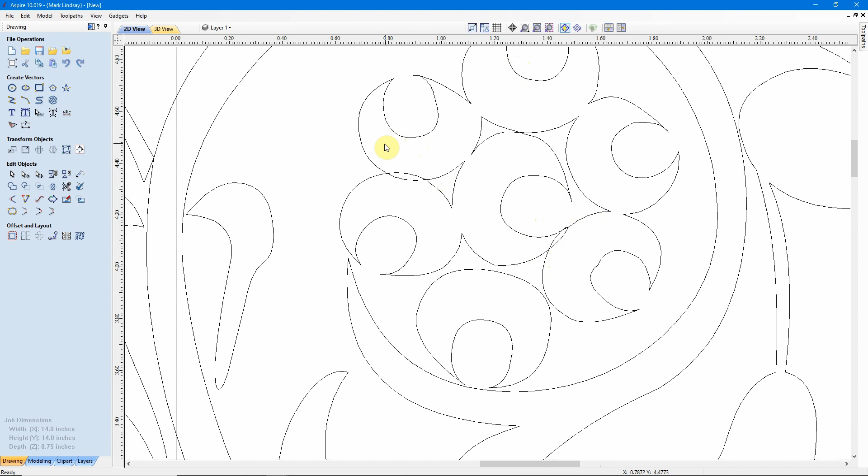Fonts are scalable vector graphics, but when you import one, they are still considered text. So when I select this, I get it in the solid pink lines because it is a text object. So what I'll need to do with this before I can fix any of these problems is I need to convert it to curves. And there's two ways I can do this.

I can right-click and select Convert to Curves, or I can click off, then reselect. I can come over here under Edit Objects to Convert to Curves. They both do the same thing. Either one, it's 100% your choice. So since I'm right here, I'll click on that, and now my solid pink lines have changed to dashed pink lines.

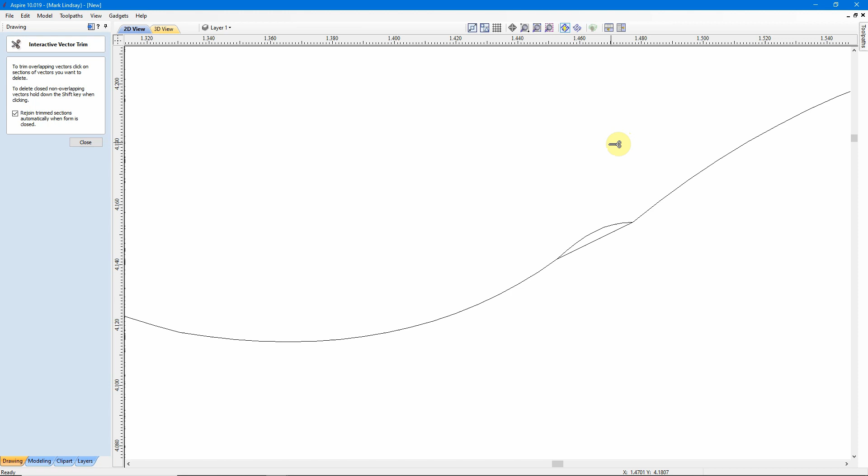I'll click off to deselect, and now I can come in here and I can fix a few of these overlaps. I'll just grab my trim tool, come along, and trim these where they overlap. I'll zoom in down here and trim that away. We don't have any other overlaps here. Those are pretty close together, but they don't overlap.

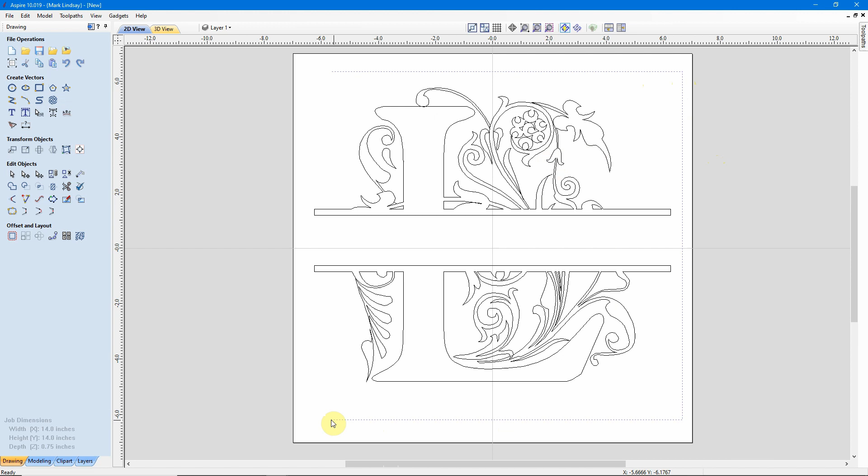Okay, now if you are paying attention, you'll see down here that we have another overlap. I'm going to back out of the trim tool for a minute, and I'm going to introduce a new tool for this. What I'm going to do is select all of my artwork here, and I'm going to use the Vector Validator. And we'll find the Vector Validator over here under Edit Objects, in the second row all the way to the right. I'll click on that icon, and I'm going to V-carve this, so I'll go into V-carving mode.

That modifies the search criteria for the Vector Validator slightly. It knows that you're going to V-carve this. It looks for things that are really going to impact V-carving. I'll go ahead and click Search Selected. It'll go through and search it. And now we see a bunch of symbols out here.

If we look here, we have zero length spans, meaning we don't have any pieces that are identified as separate vectors that have a 0 length. But we do have 4 overlaps and 45 intersections. So we'll need to clean up these intersections and these overlaps. Now what these symbols out here are, this gives us the key to these symbols. If we zoom in, we'll see that some of them have a plus sign. That's an intersection.

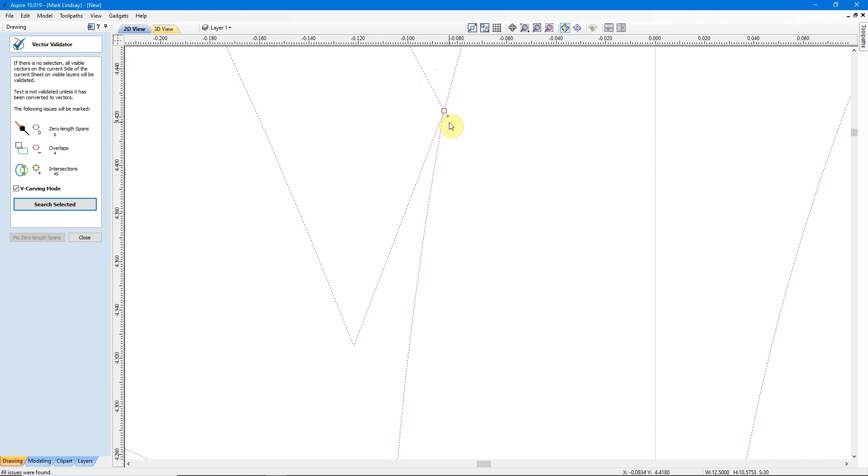I'll zoom in so you can see, that's telling me right here, this vector meets this vector. We'll need to fix that. Then we have overlaps. I'll look for the equal sign, and that's telling me that this vector here overlaps with this vector here. So this must be a separate vector.

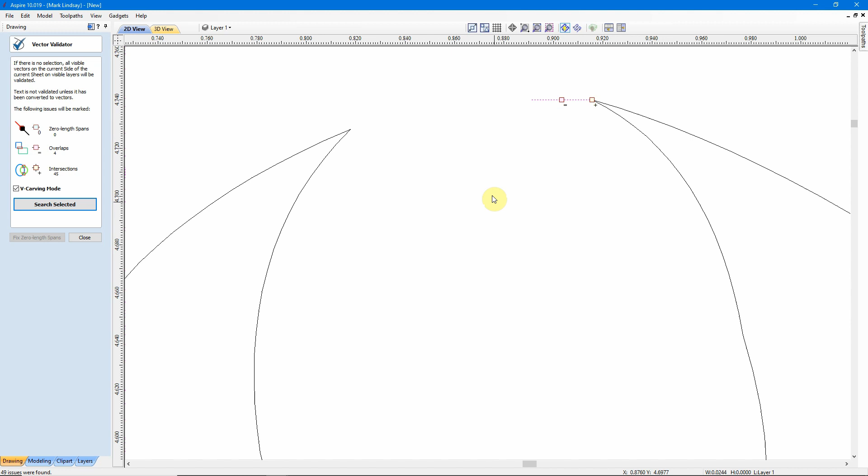So the way I'll check for that is I'll click off to deselect, click on it, and we see that it's a separate vector. Well, we don't need that. In fact, we don't want it at all. So I'll just tap the delete key on my keyboard, and it's gone. Now I can zoom back out and see if we have any other overlaps that are similar.

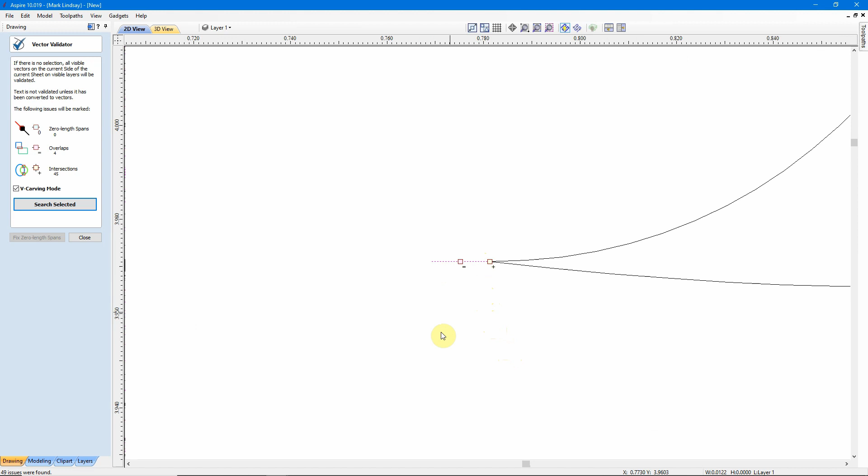Yeah, so we have one right here. So I'll select it, and it's the same as the other one we just got rid of. I'll delete it. Then I'll just kind of look around for other symbols. We've taken care of these two. And we'll now come down here and see we have these intersections. Right now I want to check for the overlaps. That must be down below here. And I don't see any more overlaps.

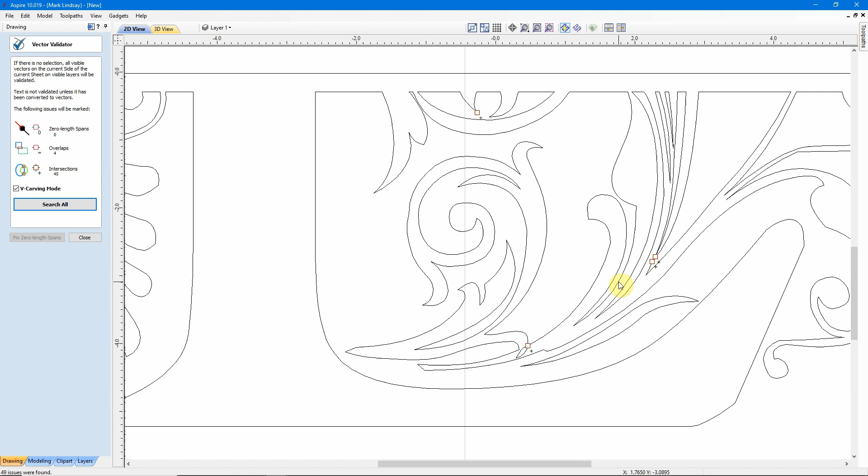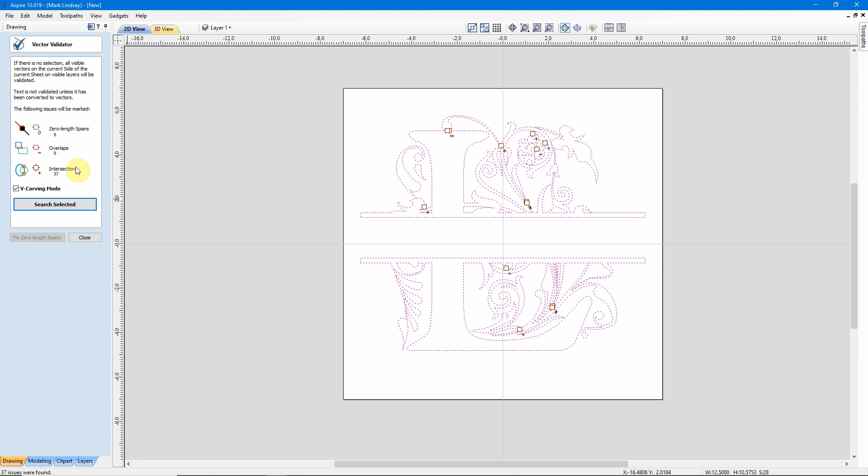So what we'll do is we'll click off, close the Vector Validator, select, and do it again. Vector Validator, V-carving mode, search selected. I now have 0 overlaps. That was enough to get rid of those 4, and it took care of a few intersections. Now for the intersections, that's a little bit different. We're going to have to come in and decide what we want to do.

For instance, we have this intersection right here, where this piece comes down and crosses over this piece here. Well, as a font, that doesn't really matter, because remember, fonts were designed to be printed. This was designed to either be filled with ink or laser toner.

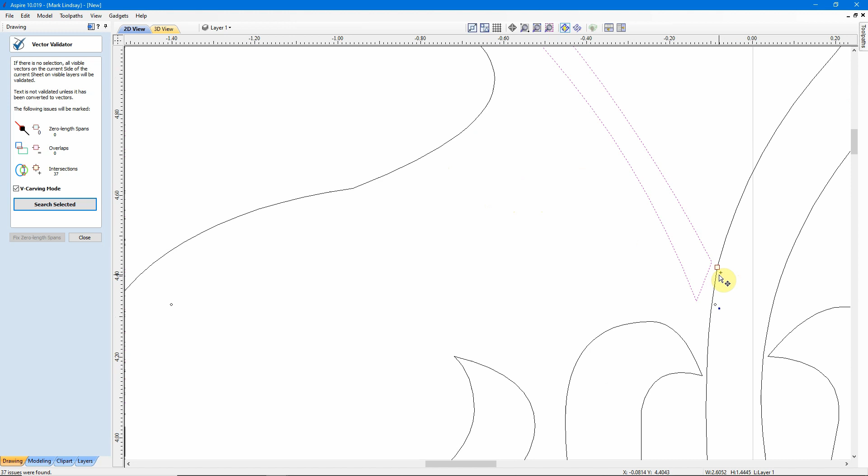So in a situation like this, I can click off, select this vector, select it again to go into Move Transform mode, and I will bump up on my up arrow on my keyboard and bump left with the left arrow on my keyboard. Now when I zoom in, we're no longer intersecting this piece. We're also no longer intersecting down here. It's not enough to change the look of the font, but it is enough to remove that intersection.

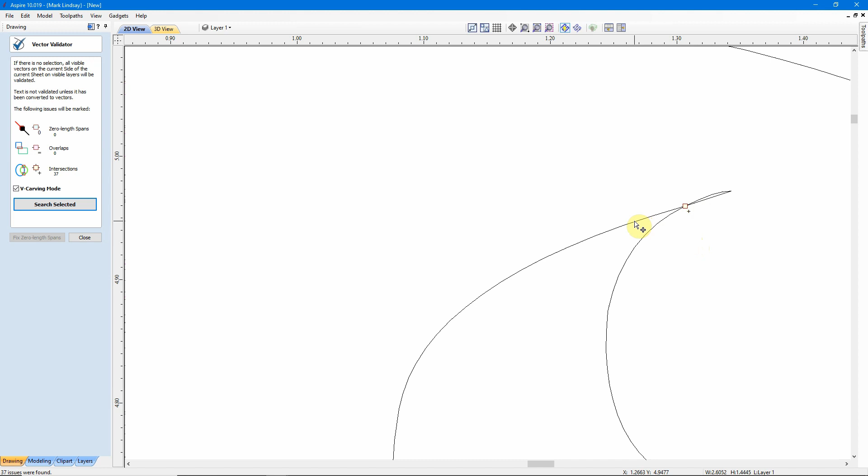And we'll come down here and we'll take a look. We have more intersections. This here we have just some crossovers. We've got a couple of ways of fixing that. One is we can click off, select that, then we see that this is a separate piece. So we'll just select that and hit delete. And that removes that intersection.

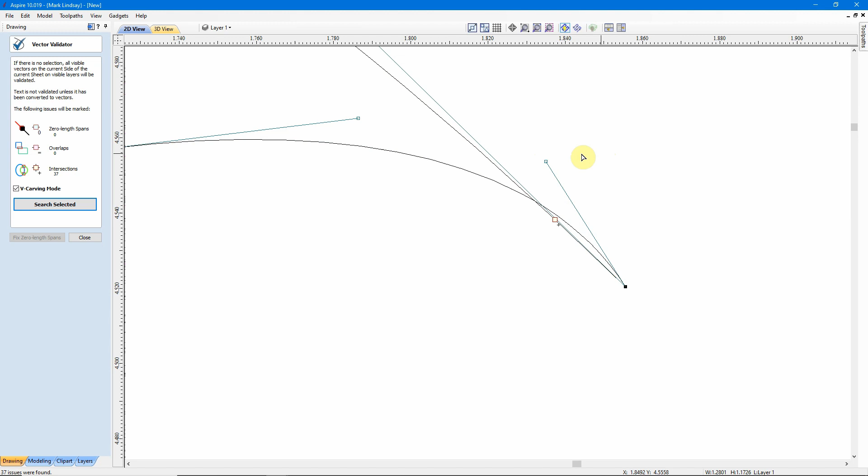Let's go down here and see if that's what this is. Nope, this one is a little bit different. This is not a separate vector. So with it selected, I'll type the letter N to go into node editing mode. And I'll just grab this handle. And I just made that worse, so I'll pull it this direction, just so they no longer cross. See, they no longer cross. Now that took care of that intersection.

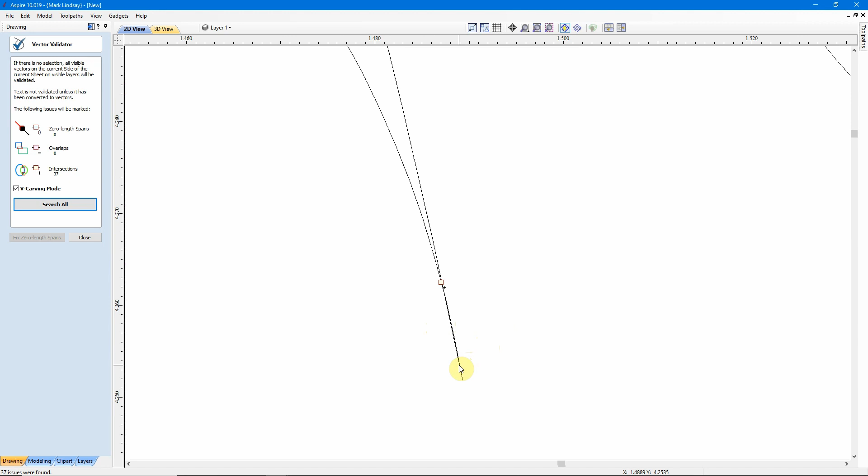I'll come down and look at this one. Tap the letter N again to come out of node editing, and we'll see if this is a separate vector. It's not, so I'll type the letter N to go into node editing, and we'll move this one this way, take a look, and we've removed that intersection. So we'll come in and we'll do things like that to get rid of any of these intersections.

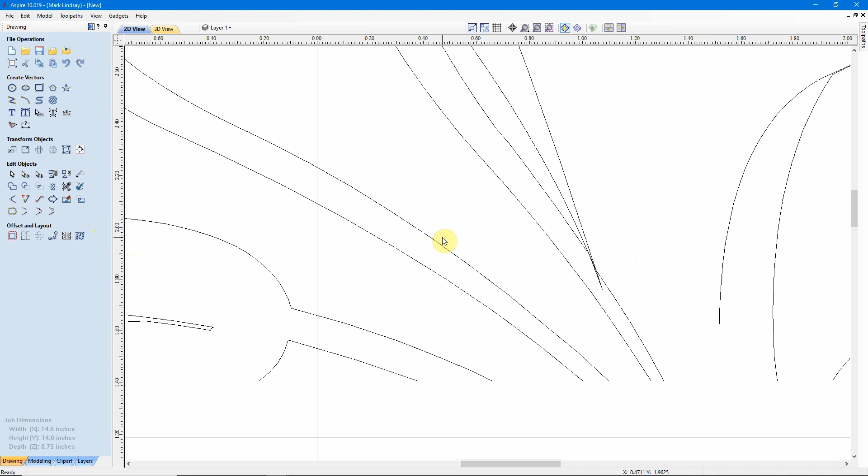And take a look at this one here. This is a little bit different case. I'll tap N to come out of node editing, and I'm going to close my Vector Validator. Grab my trim tool, and I'll come in, and I'll trim that away. Then I see where this is going here. I will close my trim tool, select that vector, and I'll just bump it with my cursor right button.

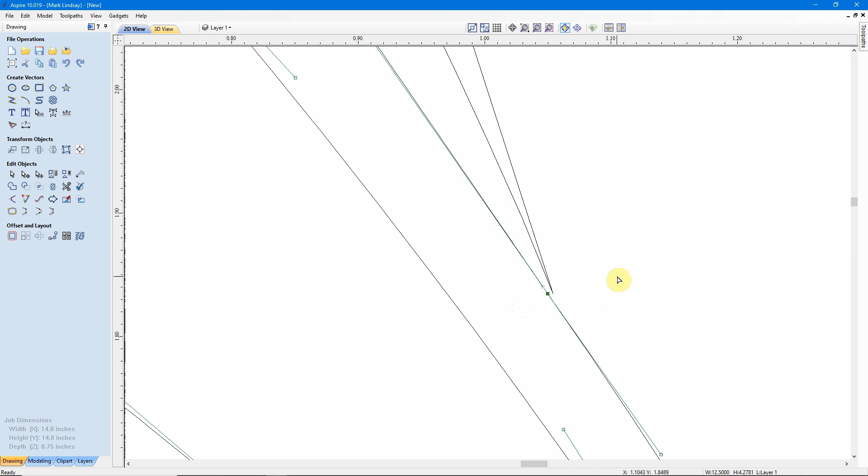Select this one, tap the letter N to go into node editing mode, drag this point down to meet this one, tap N to come out of node editing mode. Now I'll come over here. I have one open vector, I'll join it, it's now closed. So you see it's not connected, but it is close like it's supposed to be.

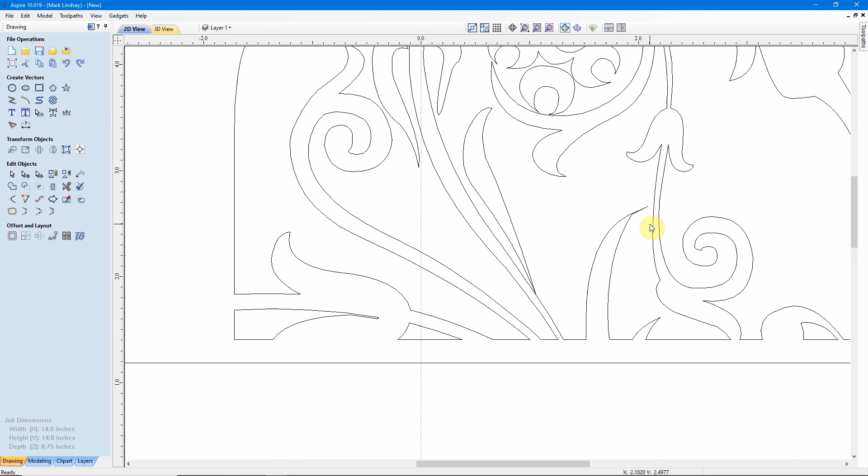Looking right here, I think I have another one. And this takes a little bit of time. This is going back and forth, selecting all, going into the vector validator, going into V-Carving mode, search selected, and looking for overlaps and intersections. So I'll go ahead and I'll finish taking care of all these. Then when I'm done, we'll come back and continue on with the project.

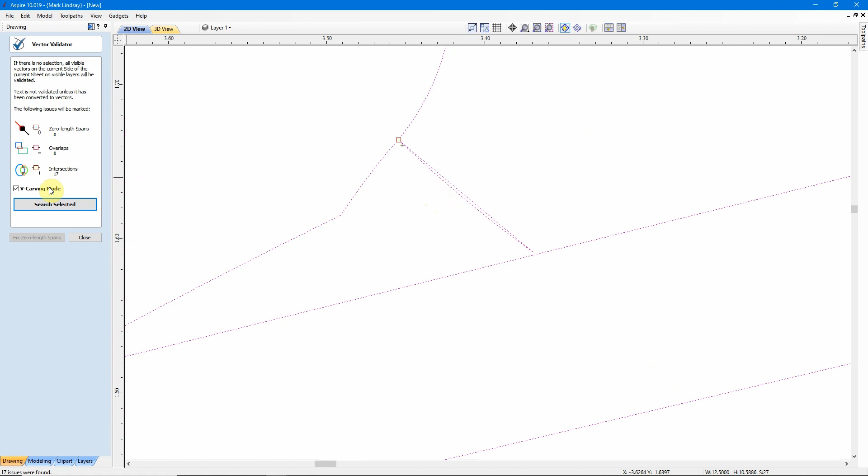Okay, with all of that completed, let me select it all one more time. We'll go back in to do the vector validator, search. I have 0 intersections, 0 overlaps, and 0 length spans. So we're set there. Now I'll click off to deselect everything. I'll right click, go to selection, and click select all open vectors. No open vectors in design. So our initial is prepared and ready to VCarve.

I'll hold down the Control key and tap the letter A to select them all. And I want to group these. That way I don't accidentally select something out here I don't want to select. With that finished, now I want to add my name here in the center. So I'll go back up to text. And the font that I'm going to use in here, just for me, is called Algerian.

Now, the Algerian font, I was hesitant to use this for this demonstration, but I like the looks of it, so that's what I'm going to use. I cannot give you a source for the Algerian font. The Algerian font is trademarked and copyrighted, and it has come with Microsoft Office products since, I believe it was Microsoft Office 2002. It may have been earlier.

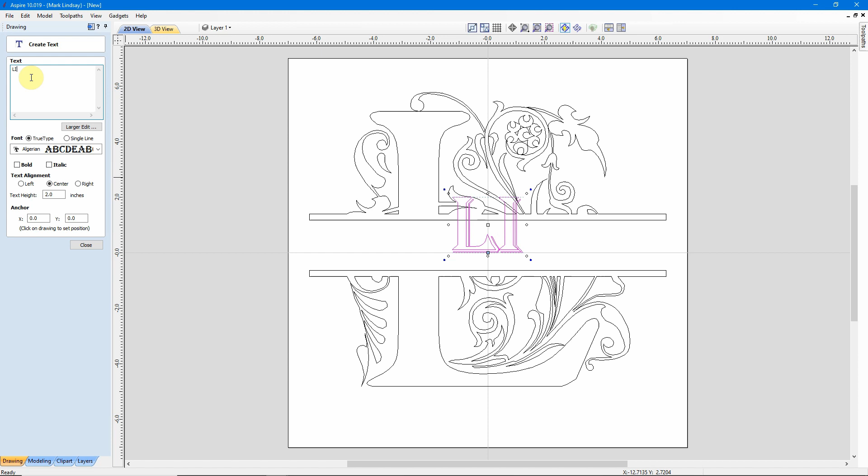Normally I don't do things of this nature because it anchors the base of the font on that X0, Y0, and I'm going to want it down here. But we can adjust that after it's done. Also with the Algerian font, capital letters work best, so I'll go into caps lock and I'll type my last name. And I'll close. Now before I do anything else, I'll align the entire word to the center.

I'm going to go ahead and click it one more time to go into Move and Transform mode and bring it up and make it a little bit smaller. A little bit smaller here. But before I do a lot of resizing, I need to do some spacing. Because if we look here, between the L and the I and the N, our letters are way too close together.

So I'm going to go ahead up here to Edit Text Spacing and Curve. And I'll click on that icon. And when I bring my cursor over, you see when I get between two letters, it changes to a V and an A with a couple of arrowheads pointing towards each other. If I click right now, it's going to move these letters closer together. But if I get in here between two letters, hold down the Shift key, those arrows point away from one another. So when I click, it moves those letters apart.

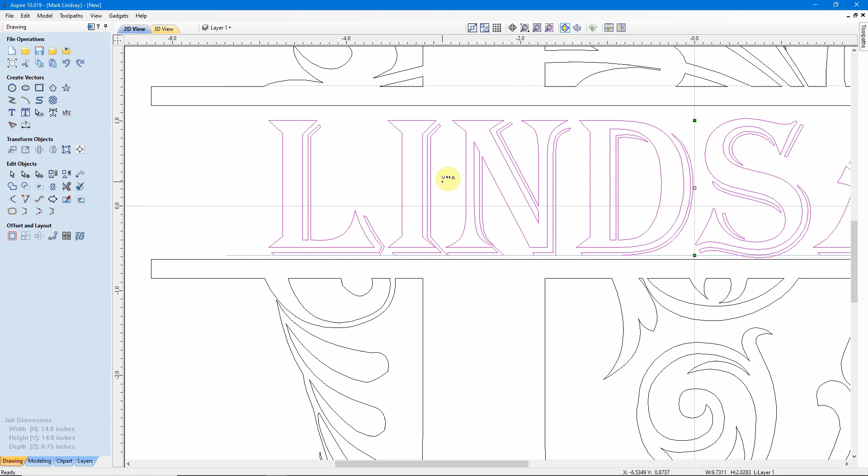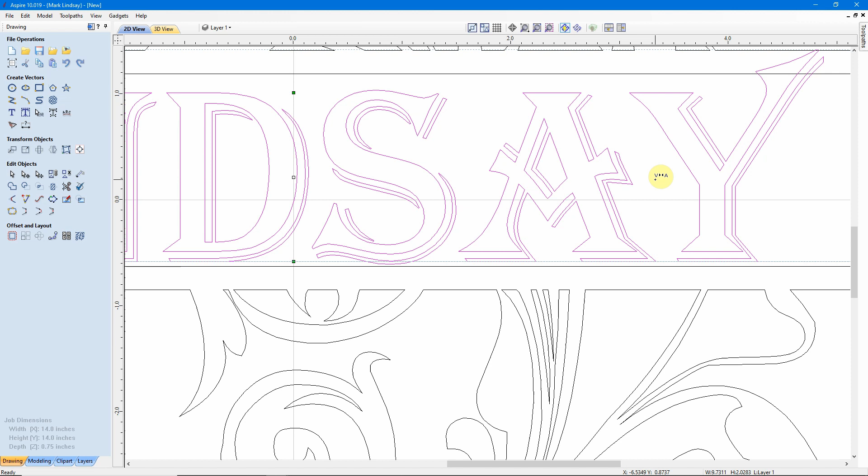And I'll come over here, still holding down Shift, click, kind of move those apart a little bit. In fact, now that I look at it, I'm going to click one more time for each one just to kind of spread them out a little bit. Now on the other side of the coin over here, the A and Y are a little bit too far apart. So I'll go ahead and click that twice, maybe 3 times, yeah, to bring them closer together. And I'll go once here, and I think I'm going to leave these alone. So that kind of tightens it all up a little bit.

So now I need to come back over here and click on selection mode to come out of my kerning adjustment, click off to deselect. I still want to resize a little bit because my letter Y is pretty tall. So go up here to this corner and I'm not holding down Shift. I'm just dragging that down a little bit to where it's down inside this space here. And now I will align horizontally. I will not change the vertical alignment.

And I think that'll work. This one letter here is a little bit taller than the rest, trying to get an even space here and here. And I think that works out okay. I'll close this. Now I want to just lengthen my text. So I'll come over here to one of these center boxes on the side, hold down Shift, click on that box, and drag my text a little bit longer. Take a look at that and see how that looks. I think that's a little bit better. And click off to deselect.

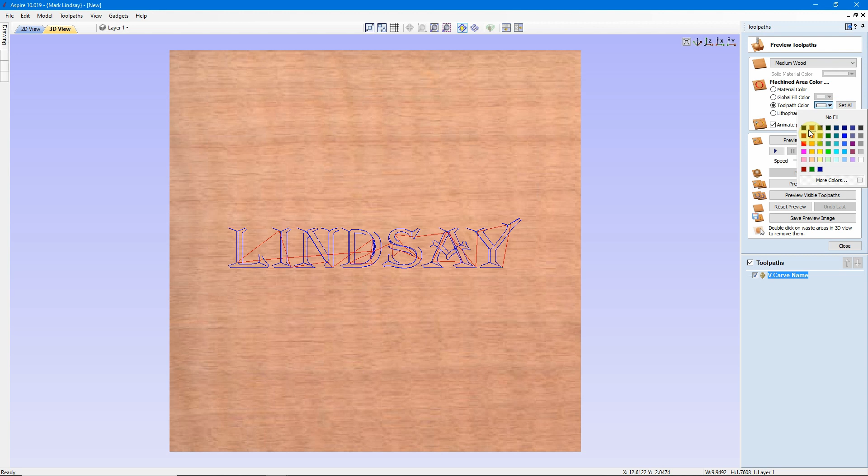Now, I happen to know from using this font that, using the 90-degree V-bit, none of these in here are big enough to use an 1/8 inch end mill or any kind of a clearance tool, so I'll just go ahead and turn that off. And I'm going to call this VCarve name. Oops, I forgot it was in caps lock. I do that just about every video that I use the caps lock on. And we'll calculate. I'll go ahead and change the toolpath color to black so that you can see it. And we'll preview that toolpath.

And there we go. Then I'll come back over into my 2D view, close my preview window. Then I'll select this group and we'll V-carve it. Same settings. Flat depth of 0.1. I'm using a 90-degree V-bit. This time, because I have these larger areas here, I am going to use a 1/8 inch end mill as a clearance tool. I'm going to ramp in the plunge moves over a distance of, let's see, for an 1/8 inch bit, I will make it 0.5. So it'll plunge in to the 0.1 over a distance of a 1/2 inch.

And we'll call this VCarve Initial. Calculate. And there are my two toolpaths. One of them using the V-bit and the other using the 1/8 inch end mill. So I'll select this one, come up and change my toolpath color to black. Then I'll select this one and change my tool color to black.

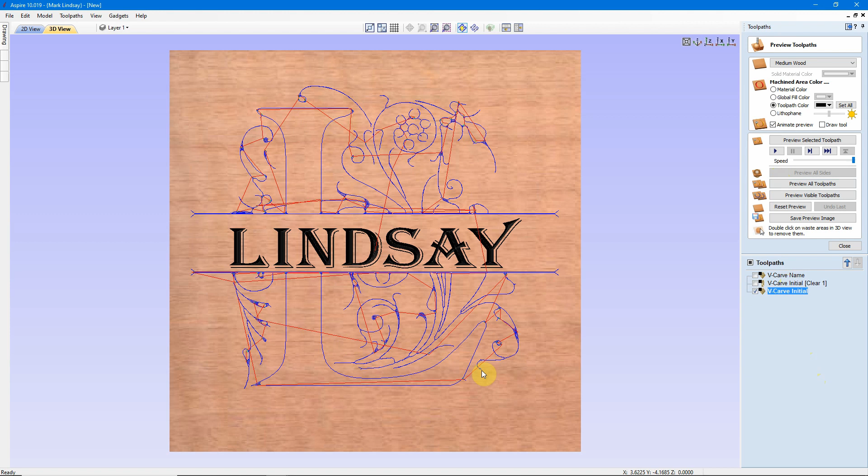Let me clear up a little bit of a misunderstanding by a couple of folks. These check marks do not select the toolpath. They make the toolpath visible out here and visible to the preview window. If I uncheck that toolpath there, we no longer see the toolpath out here. Uncheck that, we no longer see this toolpath out here. All the check mark does is make it visible.

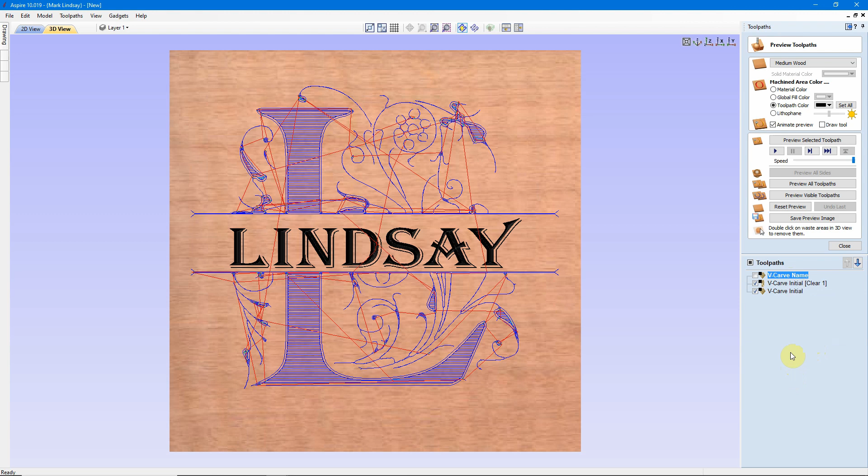Clicking on the name, you see how it's now blue. That is a selected toolpath. So to select a toolpath, you have to click on the title. To make a toolpath visible, you put a check mark in the box. So, just to clear that up.

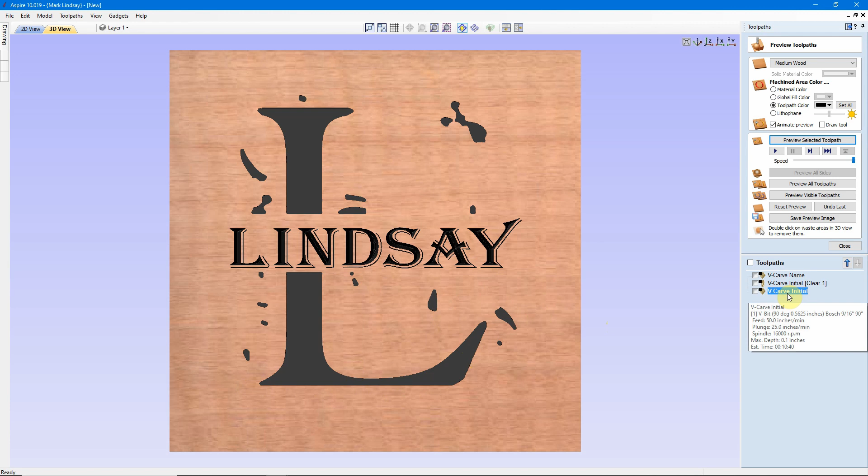So, we're going to start with the clearance toolpath, which uses a 1/8 inch end mill. We'll preview that. And that has milled away everything that it's big enough to get into. Then we'll go to the V-Carve toolpath that uses the V-bit. Preview that one. And that fills in all of the details that are too small for that 1/8 inch end mill to do. And there's our project. Believe it or not, even using that vector validator, this is the simpler, easier way to do this.

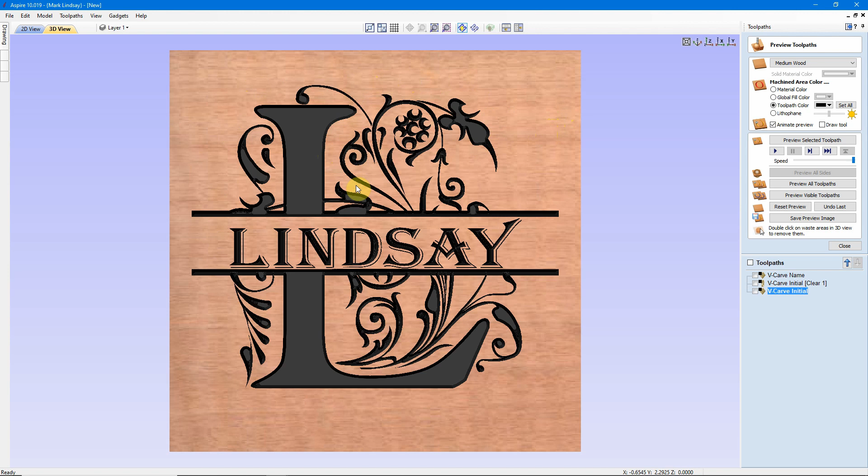Earlier I said I prefer to use the fonts because it makes them available to other programs. You can, however, go back to this website and download the SVG. Modify that once and then save it so that the SVG file has all of these changes that we made out here done one time. So my point in this is, if you are going to only use this split initial font for this type of work within VCarve or another CAD/CAM software, it might benefit you to go ahead and download the SVG format. Then when you need to make a modification like we did, all of those intersections, all of those overlaps, you do it once and save it.

By using the font like I am, if I go to create another sign using this font, I'm going to have to go back through and make all these modifications again. Now, personally, I don't do this for a living, so it's a one-time use thing for me. But if you plan on using this kind of thing quite often, it might be to your benefit to use the SVG file and make the modification one time only. So earlier on I said that there was an easy way and a difficult way. Believe it or not, this is the easy way. There is a more difficult way that will create this V-Carved Monogram. But that's for another day. That's for another video.